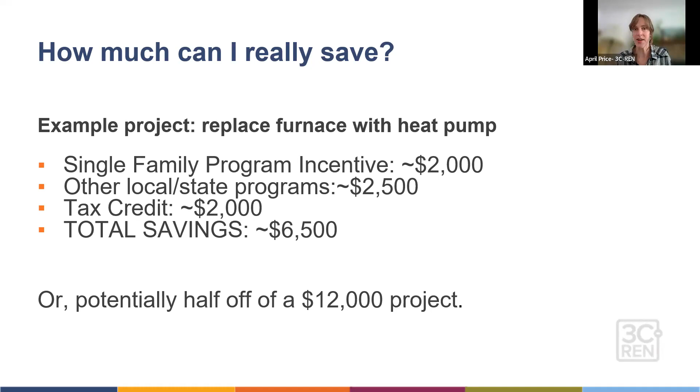So if you're looking at perhaps an overwhelming upfront cost of something in the neighborhood of $12,000 for a heat pump replacement, it's not unreasonable to think that by stacking these incentives or tax credits, you'll save half off your project. And as long as you work with an enrolled contractor, you'll be walked through those offerings. So with that said, I'm happy to answer questions in the chat regarding incentive programs, but I am very happy to introduce our guest today, Larry Waters from Electrify My Home. And I'll go ahead and just pass it over to you.

Hey, thank you. I appreciate that very much. And we appreciate being part of the 3CREN program. Today, we're just going to talk about how to electrify your home, preparing yourself for the path forward on electrification. Just a little bona fides real quick. I've been in the HVAC industry since 1982. That's a long time ago for those that aren't keeping track.

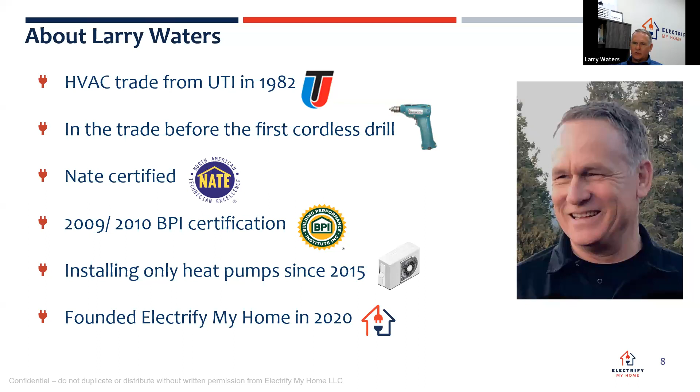I'm a NATE certified technician. I have been a BPI certified building science person since 2010. I personally have only been installing heat pumps since 2015. And that was before we really had the word electrification or decarbonization on the tip of our tongues. And I founded this company, Electrify My Home, in 2020, so that we could be an absolute resource for consumers that really wanted to understand the full approach of things. For the agenda today, the introductions which you've had, we're going to talk about validating the switch, kind of the reasons why we would want to electrify.

Where do we start as a homeowner? The order of operations, because that's extremely important when you're doing this. And then our process of what we call good electrification. One more thing about us, our mission statement is to provide the most efficient, cost-effective electrification solutions, be a good steward of the electrical panel.

We talk a lot about electrifying on your current electrical system, and training and influencing other contractors to do the same. We also do these homeowner workshops for several different utilities across the state as well. So getting the word out for good electrification is extremely important.

Really quickly, the basics of validating the switch. So why do we need to electrify in California? So it's pretty easy. We've got pollution goals in California. In fact, of the top 10 cities in the country for bad air, 6 of them belong to California, which is pretty crazy if you think about it. So we established a building code that is looking at pollution-free electric heat pumps as a baseline technology. It leads to a transition off fossil fuels in the houses.

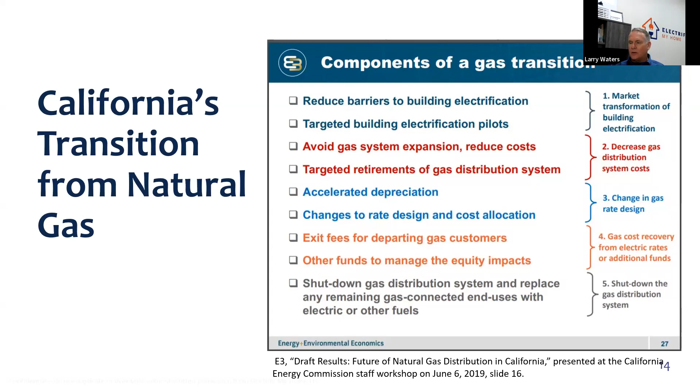Time flashes really quickly. I've been doing heat pumps since 2015. They were talking about all this way back in 2017. So we are now far beyond that. We are 7 years away from 2030, and that's a biggie. Currently, about 90% of California homes rely on gas for space or water heating. 12 million houses in California use gas or electric resistance water heaters, which both of those are a great opportunity for a heat pump installation.

11.7 million California homes, 96% of those have gas or electric resistance heating. And there's 3.4 million houses in California with no air conditioning. So probably quite a few in your area on the coastal side with no air conditioning. And we know the climate is changing. There's more and more days every year where we could be comfortable. The beautiful thing about a heat pump is it's carbon-free heating with free air conditioning.

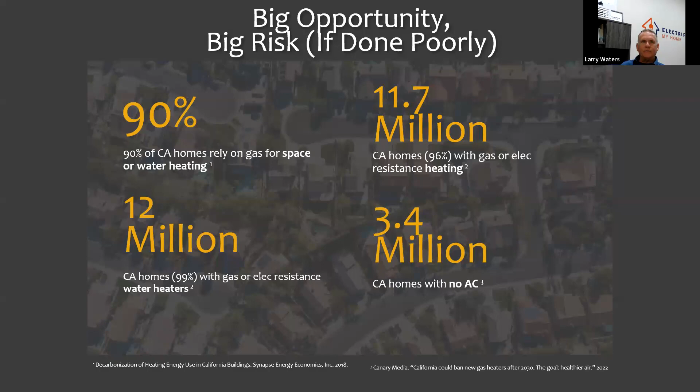So where do we start? Where do we start as a homeowner and a consumer? You should do your own gas assessment and inventory. And you can do this by just looking into your existing gas and electric usage bills, particularly the gas bills. If you're in some of the territories that are covered by 3C-REN, SoCal Gas will be your partner with gas, and analyze your bill.

Look and see when it's costing you, what it's costing you. A great way to do that is look at April and May, find out what your lowest bill of the year is, and then look at your highest bill of the year and just realize that's what's going to heating a little colder water and heating your home. So those are the dollars that we can recoup when we're doing the electrical upgrades.

If your electric is Southern California Edison, you can go to the Energy Manager on their online portal. If they use PG&E, they've got a great resource available with Home Checkup. And if you really want a comprehensive report about your usage in your particular home, all gathered through data, you can go to our website, or you can go to find home energy analysis, or you can go to electrifymyhome.hea.com and you can take the test. They'll send you out a really cool report that tells you when and where you're using your energy.

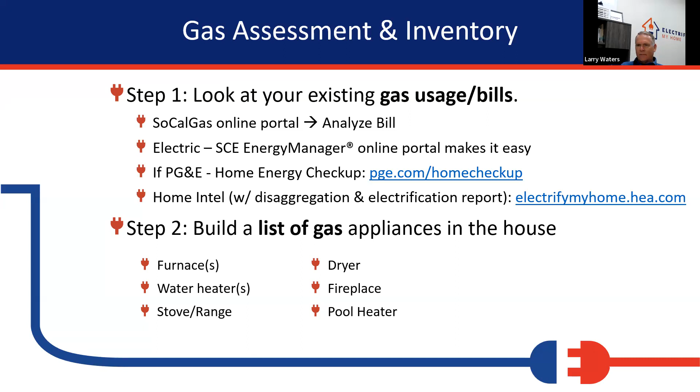Step 2 would be to build a list of gas appliances in the house. We want to make sure we're thinking of all of them. Even the pool heaters out by you guys, dryers. A lot of people don't recognize that they have gas dryer, gas fireplace, stove, range, water heater, and furnaces. These are all the pieces of the electrification roadmap. There's really eight things in the house that you really concentrate on that could possibly give you a good benefit.

But induction cooktops, heat pump HVAC, heat pump water heater is what we're going to concentrate on today. Solar PV, if you don't have it. The economics have changed on solar a bit in the last year, but solar is still a really good investment if you also invest in storage. Electrical panel upgrades may be required as you get further down your electrification path. And then, look at heat pump clothes dryers if you don't do too many loads of laundry a day.

So how can you find an electrification partner? It may not be your existing HVAC contractor, so keep an open mind. HVAC contractors in California have been extremely good at working on gas furnaces for years. They're really experts on them, but installing heat pumps in houses with gas furnaces is really a very new thing, and a lot of people are still figuring it out. So be careful about who you choose.

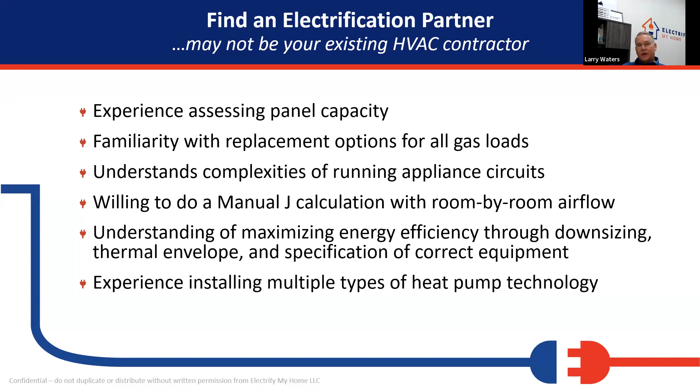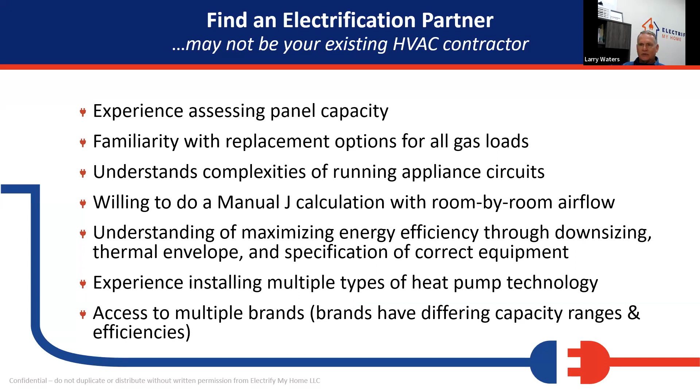Find a contractor that has experience installing multiple types of heat pump technology. And we're going to talk about that towards the end of this presentation. You'll get a better understanding. And access to multiple brands. No one brand does it all. There are several contractors out there that handle multiple brands, but it's not a 100% one size fits all with heat pumps, especially. Gas furnaces a little less important, but just ask if that contractor has access to multiple brands and multiple types of heat pump technology.

Make sure you do a little due diligence on these companies and check for reviews. Look at the Yelp reviews, whatever you're looking at, and then look at them a little deeper than just the number of 5-star ratings they have. A lot of contractors have a lot of 5-star ratings for, like, Bob came out and fixed my furnace when it was really cold. That's not going to give you good reference to whether they know how to install a heat pump or not.

There's several other ways you can find people, like on Energy Sage, or some of the heat pump manufacturing companies like Fujitsu, Mitsubishi, and some of those also have dealer locators that'll help you. And those groups are also going to help you find somebody that's probably going to do a little better workmanship, because bad workmanship can really cost you a lot of money.

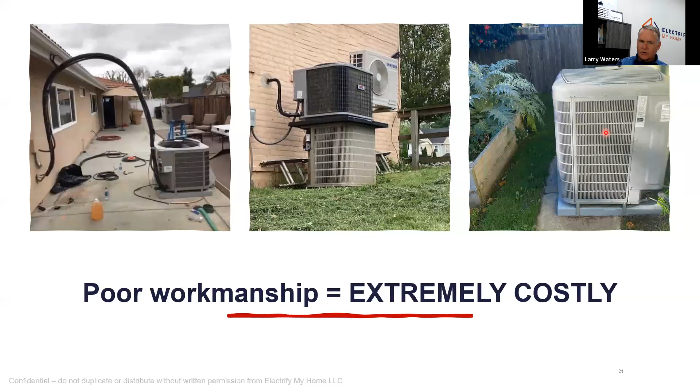They had to get a new panel to get this system installed, and it was only big enough to carry the capacity of this. So they had to invest in electrical panels twice. If they would have put the right solution in the beginning, they would probably have never had to put an electrical panel in until they got their storage batteries. So that's important.

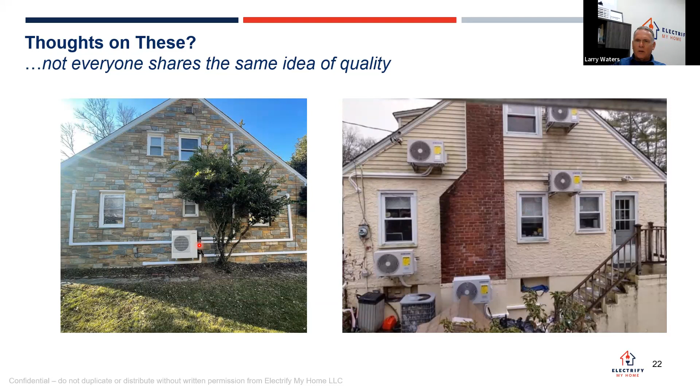If I had this beautiful house here, I wouldn't want all these lines up my wall. That may have been the only way they could have done it. But if I came rolling up my driveway and I saw that and I wasn't expecting it, I would be a little bit irritated. Even though it looks symmetrical, it's not necessarily pretty.

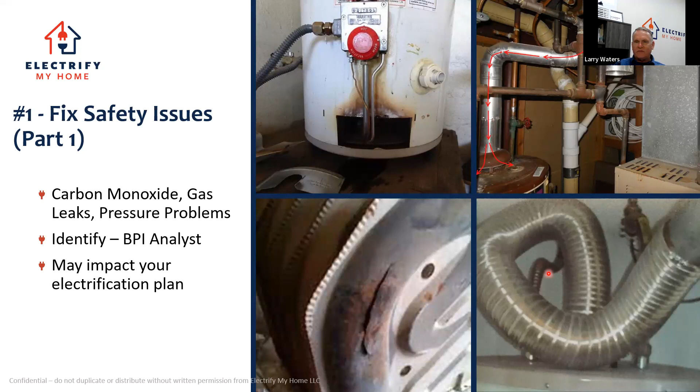Order of operations. Every house is unique, and we recommend a specific cadence on this. First of all, get somebody that's savvy on looking for safety issues. The safety issue can change the direction. This has happened before, where the first order of business was to install the heat pump water heater, and then we come in and find a furnace that's unsafe. Or we want to replace the furnace with a heat pump system and we find a water heater that's unsafe, or some fluing that's unsafe. You need to make sure when you talk to a contractor that they have the ability to diagnose safety issues, and they will be doing a safety check as part of your electrification plan.

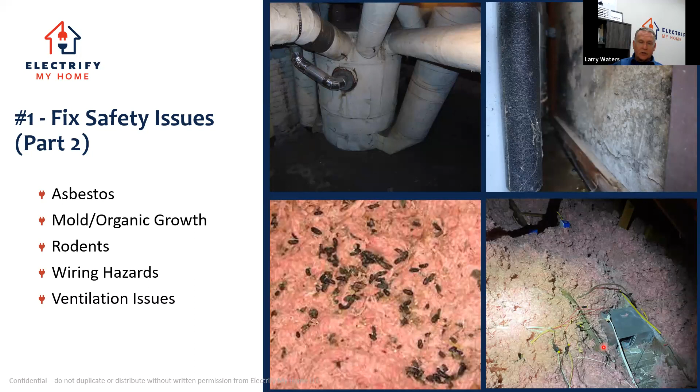That includes things like mold and asbestos, and just rodent damage, or incomplete things like bathroom fans in your attic that aren't hooked up all the way. These things need to be discovered and not buried under construction. So it's important that the contractor takes a lot of pictures, shares a lot of pictures with you, and you ask a lot of questions.

You want them to be able to do an electrical panel assessment. The important things to understand there are: how much service do I have available? What is my main breaker? What is my main power input? And then how are you going to manage that? And can you do it without a panel upgrade? How big is your panel? How old is the panel?

Do you have sub panels in the house? What are the breaker sizes on those? Don't add a circuit into a sub panel unless the circuit breaker that feeds it is capable of handling the load. And this can help you figure out when you need to do your panel upgrade, if you need to at all.

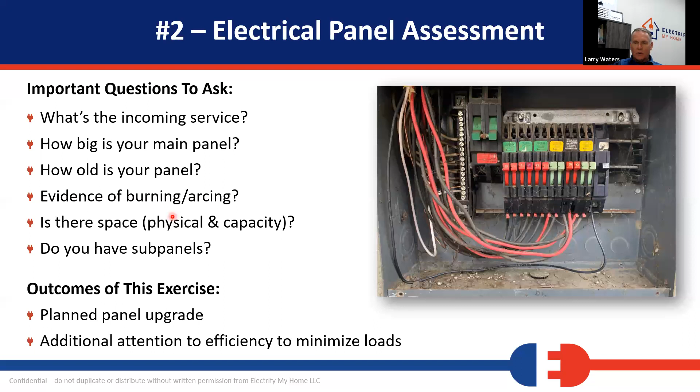We work in the Bay Area of California a lot, which has a bit of a similar kind of temperate environment that you guys share. And we did just under, I'm looking at my whiteboard, just under 200 heat pumps last year and only had 6 panel upgrades. So it is possible to electrify a lot of this stuff before getting your panel. Our philosophy is let the battery and solar guy do the panel.

Pre-wiring. If you have the opportunity to pre-wire, if you're doing a heat pump system now and you're thinking about a heat pump water heater later, inquire with the contractor about running that wire to that heat pump water heater now, so that when that water heater inevitably fails on a Friday evening, you can get a heat pump put in there and you don't have to go back with another gas model because you couldn't get an electrician out there to run the wire.

This has saved multiple of our customers over the last few years a real headache. When we get the call on Monday, it's like, hey, you put in that circuit, my water heater finally died, and then we can get out and take care of those pretty quickly. And make sure that you're keeping in mind that most houses in California are going to have an electric car at some point.

Addressing the ductwork in the system. We want to make sure that the ductwork is in good shape. Heat pumps and furnaces have different requirements for airflow, and you need to have a contractor that understands. It's not a bad idea to talk to multiple contractors about this. Use some of this information to get the feel for the best one.

It's not always the guy that's going to come out that has a nice uniform and a charming personality. That may not be the right guy if they're just taking a peek into the attic or under the floor and saying everything's fine. You really need to do an assessment on the ductwork.

Old duct systems oftentimes have very low airflow. A typical duct system leaks about 30%. When we're talking about installing a heat pump that sometimes has 30% or 50% less capacity than your furnace, it's really important that the duct does not leak 30%.

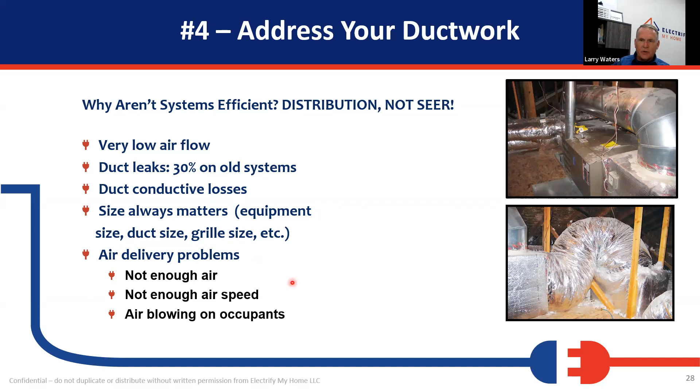Now, this is from an older home. I think you guys have a batch of these houses out there too, with built-in china cabinets next to the fireplaces. These always leave big holes up in the attic, and these big holes transfer heat. They suck heat out of the house in the winter, and they cause heat to come in the summer, because they're open to the hot or cold attic temperatures. So be careful about that.

If you have a crawl space, ask the contractor, are you going to be sealing in my crawl space? Because there's usually big holes under there, and these big holes, when it's cold outside and your house is warm, it'll either steal warm air from the house, or the warm air rising in the house will pull cold air in behind it. So it's a really good idea to seal up some stuff if you have the opportunity to do that. These big holes, we just seal them. We put a piece of foam board over them and then insulate over them. But don't be afraid to ask these questions. Does my house need to be sealed?

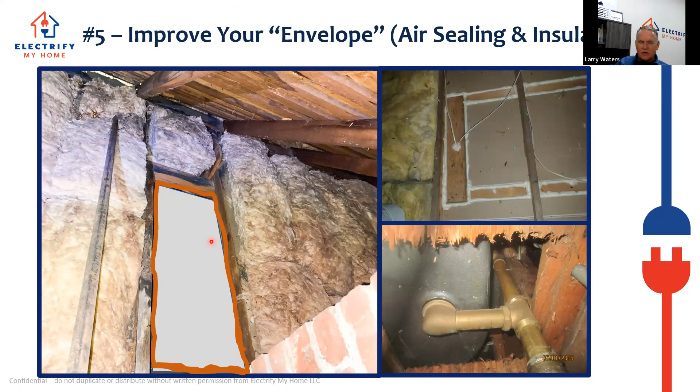And then put as much insulation in as you can get in, up to R50. R50 is a great number. That's what this is. This is about 20 inches of insulation. R50 means your attic has to be 50 degrees warmer or colder than the house before any energy is moving through. So on a 95 degree day, when your attic is 125 degrees and you have R50 insulation, you can have your house at 75 and you're not driving any heat through the ceiling.

But if you only have this much insulation, which is about R10, anytime the attic is more than 10 degrees warmer than the house, it's going to be driving heat into the house. And in the wintertime, it's going to be pulling heat out of the house. So this is an inexpensive thing to do, and it can make things much more comfortable, and it will reduce the operating cost of your heat pump system over the life of the system dramatically. So it's a really, really good investment to insulate.

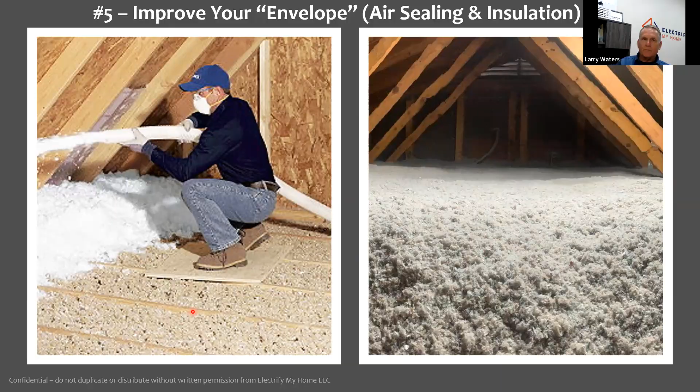And if you have your ductwork in the attic space, this slide is a good slide if you guys want to gather it. I'm just going to kind of go through it. How much insulation is around those ducts is really important, especially the hotter your attic gets. So in the summertime, when your attic is 125 degrees and your air conditioner is pushing cold air through those ducts that are sitting in 125 degree air, it uses a lot of capacity from the system just to keep those ducts cool. And what we don't want to do when we're putting in a new heat pump is pay for more capacity than we really need.

So burying the ductwork with insulation while we're insulating the attic is a really good solution to save energy. In fact, a typical 1,500 square foot house with R3 ductwork is going to use about 14,000 BTUs, or 1.2 tons of air conditioning capacity, just to keep those ducts cool when the AC is running.

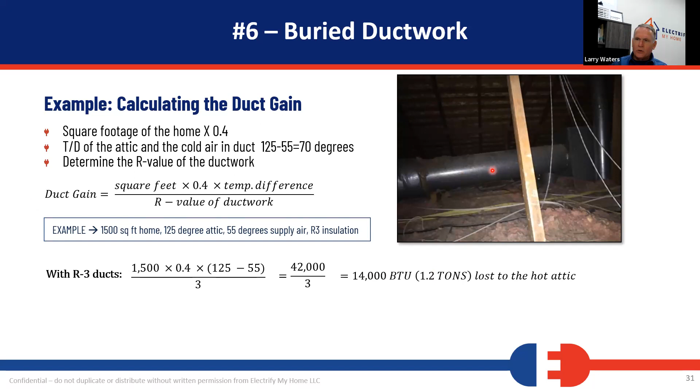So just by insulating that attic and burying that ductwork, we can get that loss down to 1,400 BTUs. So basically we save a whole 1 ton of cooling or heating capacity here. And that allows us to downsize the system a little bit, which means a lower initial price. And it also means a much more comfortable home. And then you're getting the benefit of the insulation and the insulated ductwork there.

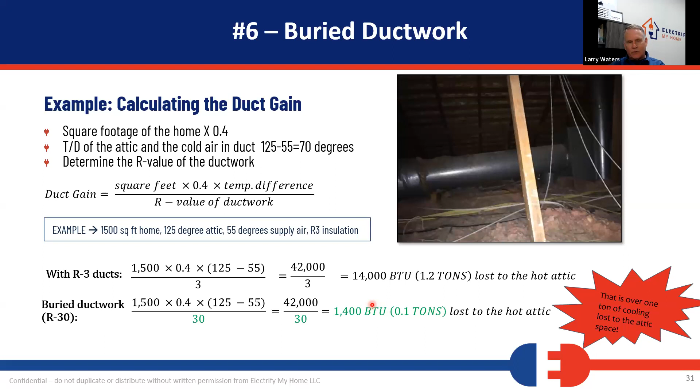That's over 1 ton of cooling capacity. Typical 3-ton house, when using rule of thumb, is going to have a 3-ton system in it. By just doing this, we've already reduced the need for a 3-ton down to a 2-ton, which is going to use a lot less energy over the life of that system.

If you can find somebody that does a load calc, not all HVAC companies do load calcs, and most of them have some way to calculate out the load. If you want to get really precise, find someone that does do this, or call a third-party service that does load calculations and get the load calculation done so the contractor can follow that load calculation. What this is going to tell you is how much airflow you need in each room, and it helps determine what size system is really needed for your house.

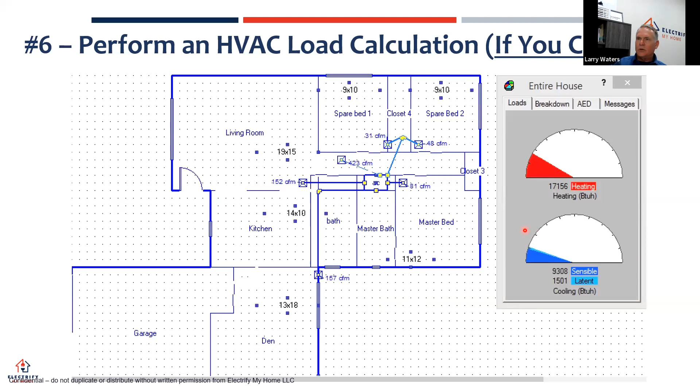And a good example of it is, here's a couple of rooms. They're both 9 foot by 10 foot. One of them is spare bedroom 1, spare bedroom 2. This is the amount of air they need. A cubic foot per minute of air is about the size of a basketball. So this room, to stay comfortable, needs 31 basketballs every minute. This one needs 48 basketballs every minute. They're both the same size, but this one has double exposure. It has 2 walls outside. If you don't take this into consideration, it's gonna lead to less even temperatures throughout the house.

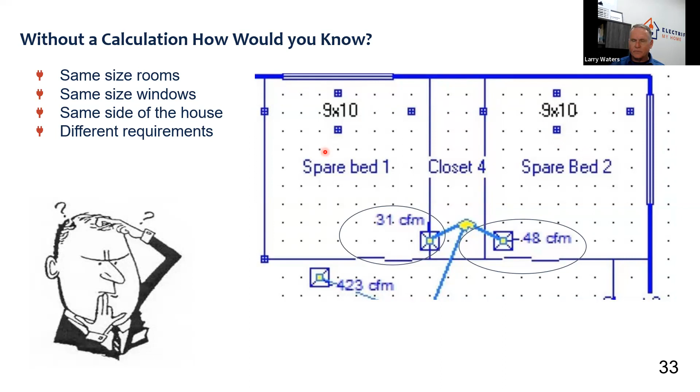What is good electrification? It's installing the most efficient solution possible. That means putting in the right size unit and putting in a unit that uses the least amount of energy. It's okay to spend a few dollars more for a system that's going to use less energy over time, because almost always you will recoup those costs on the other end of the ownership. As a matter of fact, our systems that we install typically require 25 to 35% less energy over the life of the system, which can amount to a lot of money over 15 to 20 years.

Also, good electrification is utilizing the existing infrastructure whenever possible. So that's going back to being a good steward of the electrical panel. And good electrification is also considering all electrification requirements from the start. You really should be talking to somebody that's going to at least consider those other appliances you have, the impact we're making on the panel, and give you at least a basic, semi well thought out plan.

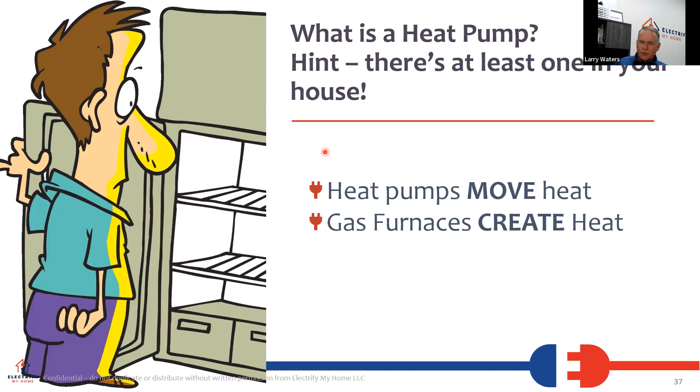And electrification can't be done without heat pumps. Heat pumps are magic. Heat pumps move heat, they transfer heat. Gas furnaces create heat. Gas furnaces burn fuel, create heat. There's exhaust that comes out, and there's always losses when we burn a fuel and get a use out of it. There's always going to be some sort of an efficiency loss. In fact, the most efficient furnace on earth is only 98% efficient. It means $100 worth of gas will buy you $98 worth of heat. It's not untypical for heat pumps to be 3 to 4 times more efficient than that.

Traditional heat pumps that just turn on and off do suffer a bit when it gets colder outside. So at temperatures below 45 degrees, they start losing a little bit of ground and they have to run longer. There are other systems that are better for that.

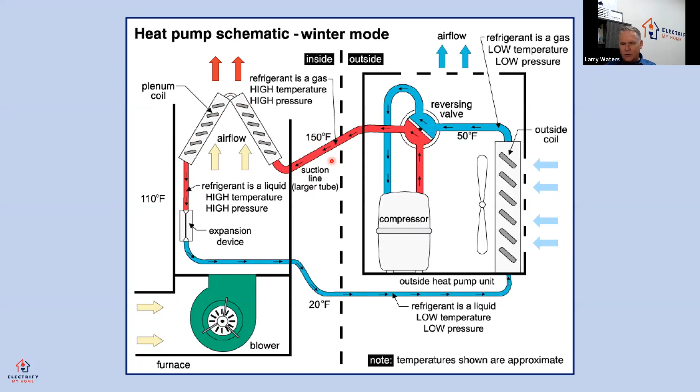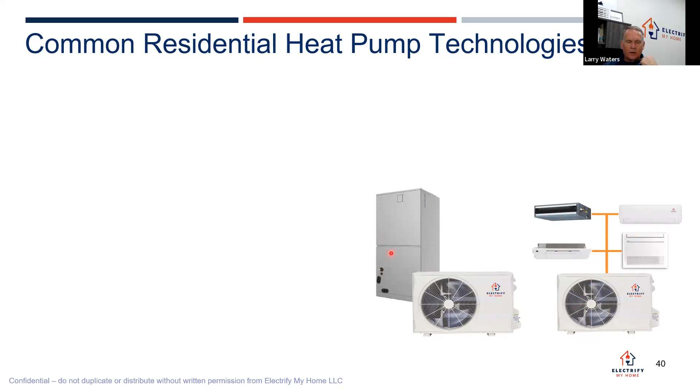Common residential heat pump technologies are inverter style systems. They can come as wall mounted units, something tucked away in your attic space or in your ceiling, or something down low on the floor like an old radiator. A lot of options for this type of unit, but something like this would require a separate unit in each living space. Or you can use the same type of technology with an air handler that will deliver through your existing or a new duct system.

The other type is called the unitary. We call them the on and offs. The on and offs are going to use a little bit more energy because every time they turn on, they have to have a big influx of energy to start the motors up. They're typically going to warm a little warmer than you're asking for. If you're asking for 75, they're going to heat up to about 76, and then they're going to cool down to about 74. And you're going to feel that temperature differential.

The modulating or inverter units are going to be able to stick to the temperature in the house. So they heat the house up or cool it down, get to the temperature, and they just slow down and run longer cycles. So they have the ability to saturate everything and make the house extremely comfortable because of longer run times. Also, with the inverter technology, we can put a really good filtration system on one of these and clean the air anytime it's operating. With this type of arrangement, we are going to give up on our ability to really clean the air as it's moving through the system.

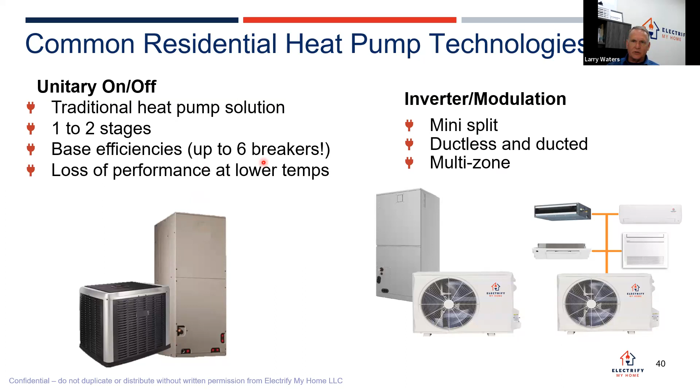Another thing is most of the time, these are going to use 2 breaker spaces, and it's going to be a much smaller breaker. These systems can use up to 6 breaker spaces. So those are things you want to consider as you're electrifying.

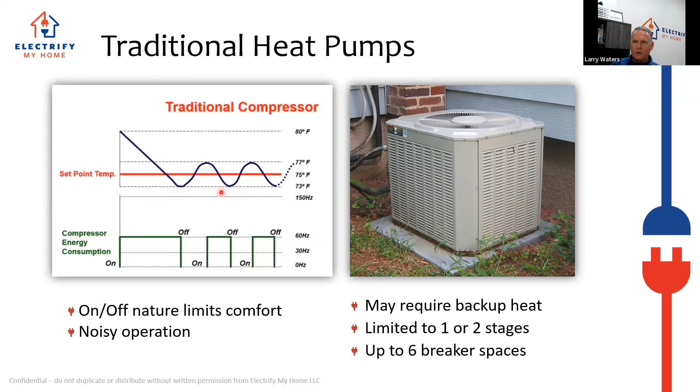So here's the graph that shows that. With a traditional heat pump system, it's 80 degrees in your house. You want it to be 75. You turn the unit on. It uses a lot of energy to kick over and run, which can really be hard on solar and battery systems. It cools the house off a little cooler than you want it to be, shuts off, lets the house get warm again, turns back on, cools off, lets the house get warm again. And it basically does the same thing in the heating mode. It'll warm up a little more, cool off between cycles. This is no longer the most efficient way to heat and cool a house. It's a lot like having arbitrary stop signs on the highway once you get up to cruising speed and good mileage.

Inverter-driven heat pumps operate a little bit differently. You turn on that inverter-driven heat pump. It doesn't use a lot of energy to start. It can operate outside the normal 60 hertz cycle range. And so it uses a tiny bit of power to kick over and start running. And then once it's running and has established the flow of refrigerant, it can ramp up and handle the load in the room a little quicker. But once it gets to set point temperature, it slows down.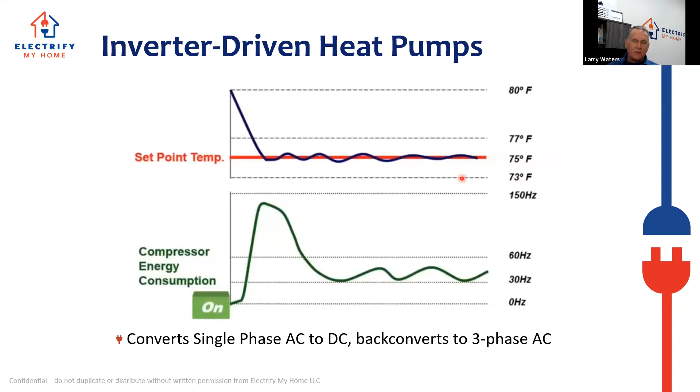Trying to plug and play a system. If somebody comes out and says, you've got a bad furnace, I can sell you a heat pump right now, I have it in my catalog. Without doing a little bit of extra legwork, having a heat pump installed can be not great.

When somebody's doing one of these, they need to pay attention to the velocity of the airflow and the temperature of the air coming out. We don't want it blowing on you. The sizing of the system needs to be right for your house. It's never going to be the same size as your furnace was. It just can't be. And it may not be the same size as your old air conditioner was if you have air conditioning. You need to do the panel planning.

That often goes by the wayside when we're plugging and playing. The plug and play heat pump really happens when something has failed and they say we can't make it run again and you want a heat pump, so we're just going to plug the system in there. We need to make sure that people are educated properly through all this, including changing the registers in the house, whether floor, ceiling or sidewall registers, to the right kind.

I don't know if you already have the right kind or the wrong kind in your house, but the rule of thumb is if your registers blow multiple directions, like two ways or three ways, those are not the best solution for heat pump systems.

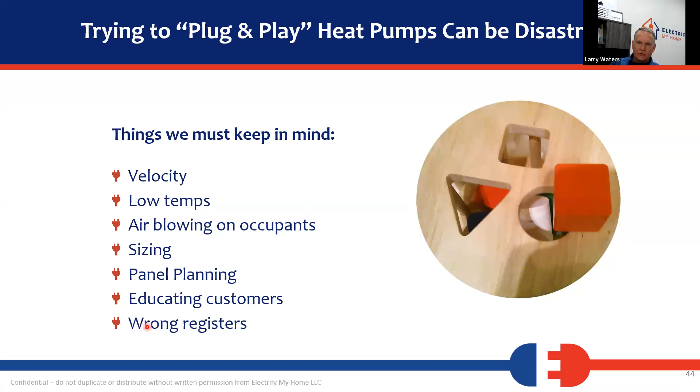Good workmanship saves money in the long run. This is why you've got to ask your contractors for pictures of their work. Most contractors are going to show pictures of their best work, just like all of us do, because it looks beautiful. But you want to see things like a proper system put in, going the extra mile with the drainage systems. Everything looks nice, neat, tidy and clean, and they can explain to you what all these pieces are.

So when they're showing you these pictures, go ahead and ask, what is that? Is it supposed to be that big? What is this piece here? Why is it on this stand when my old furnace comes in the side? Ask those questions. You're going to invest a lot of money in this, and you want to make sure you're making the right decision. Don't be worried about hurting somebody's feelings. You need to be an advocate for yourself on this stuff.

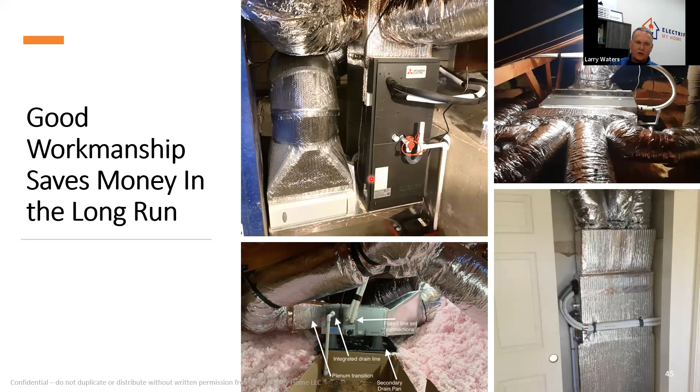Right-sized heat pumps are going to bring really big benefits. If the systems are sized right, you choose the right system and it's installed well, you're going to get way better comfort in your home than you've ever had with a gas furnace. I guarantee it. They have to be done correctly. Heat pumps are generally going to be much more quiet if you choose the right system. The inverter technology systems are extremely quiet compared to traditional heat pump systems.

You're going to be in a much more environmentally friendly position, which will help the state with our carbon reduction and air cleaning goals. Obviously, electric appliances are much safer than a furnace that has fire, can possibly create noxious gas and could potentially have a gas leak in the house. If we eliminate the gas lines and combustion appliances in our houses, our children are going to be healthier, our houses healthier and safer, and we're not going to risk some catastrophic thing happening that could cause people to get very sick.

And then you're going to have great indoor air quality if you match a new system with a good air quality device. The rule of thumb for us, and I've been in the trade for 40 years: the less fancy the filter, the better off you are. A cartridge filter that has a high MERV rating that you can replace for $40 or $50 a year is available out there.

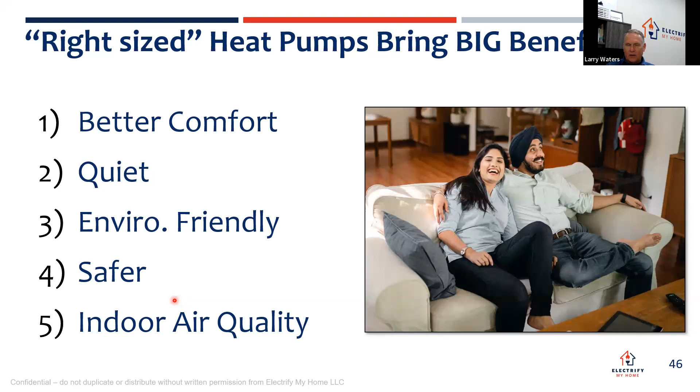There are really fancy ones that people can get you very emotional about, with wonderful blue lights, shocking electrical pulses, corona fields and all of these things. But those are moving part systems that need to be kept extremely clean and lose efficiency very quickly. A really good cartridge filter combined with a heat pump that's going to run longer is the ticket to good air quality.

So in summary, and I think we're right on time here for some questions. In summary, electrification isn't going anywhere. Don't try to wait this thing out and say, I'm just going to wait till some other government comes in and changes everything back. We're too far for that. Those days are gone. Electrification is here to stay in California. Embrace it and do it properly.

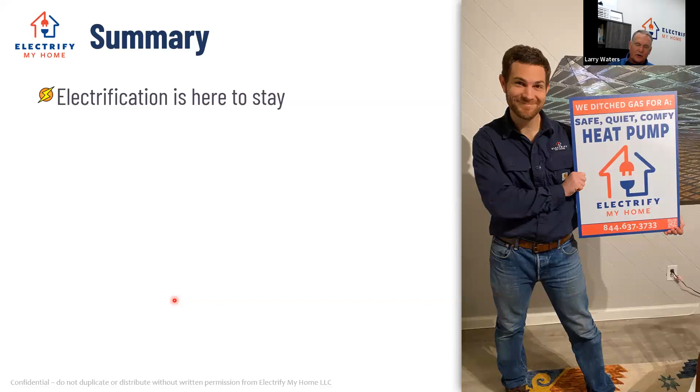Understand as well, early adopters are going to reap the benefits of the carrots. There's tons of carrots out there right now. We were just talking a minute ago about the incentives that are available. Those are not always going to be available. So do the best you can to optimize the incentives. Electrification is not going anywhere. Start by creating a plan.

Get your own plan started with the information from the first slides before you start talking to contractors, because you'll be able to figure out the contractors that are worth their salt after you start asking them real questions. Most consumers don't come to the table with any knowledge whatsoever, and those are the ones that get systems that aren't necessarily the best application. Those might be the best system for the contractor, but not the best system for your home.

So start creating your plan, get your roadmap together in your head, prioritize safety, make sure that there's going to be some sort of a safety check element in the process that you're going through. If they're going to check and make sure your water heater is safe, if they're just doing the heat pump, ask about pre-wiring, make sure you pay attention to your ductwork.

If somebody tells you without doing a comprehensive look and a calculation that your ducts are fine, talk to more people. They may be fine, but you want to have somebody verify that, because sometimes contractors might tell you that they're fine, even though they're not, just because they don't want to mess with them.

Do some load reduction, attic insulation, a little bit of air sealing. Go buy some cans of foam at Home Depot and start sealing stuff up. Just don't seal up the vent holes for your water heater. And load calculations when you can get them. Heat pumps are a necessary element, but they must be done carefully.

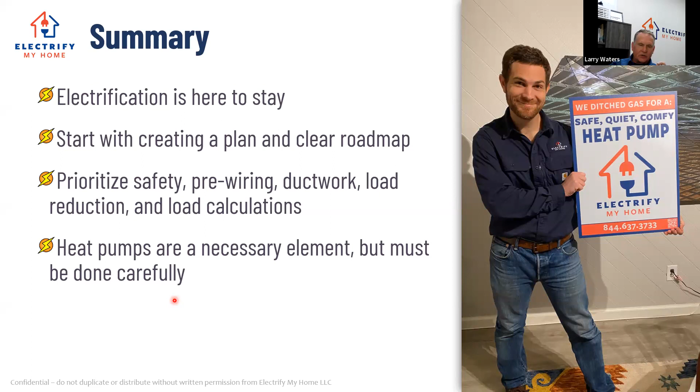We have 3.7 million houses in California with no air conditioning. When every house in California that doesn't have air turns on their air conditioning during a heat wave, it's going to cause drag on the system. If everybody goes out and gets a really efficient system installed, it's not going to cause a drag on the system, because once the house is cool, the unit's using a tiny bit of energy. So those inverter systems are really good for the environment and the whole electrification plan.

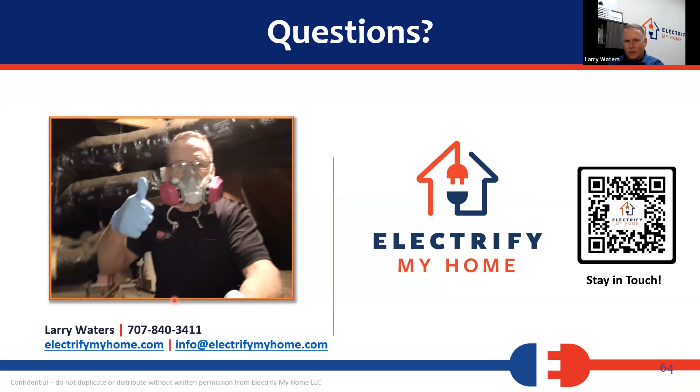Yeah, there's also on those, if you wanted to get really creative, there's different switches and things that you can buy that you can plug the unit into, and you can program it not to run during those times, and it just basically shuts off power to the unit during a certain period of time. So you might want to look for something like that as well if you don't want to wait on the Bradford White controller. Okay.

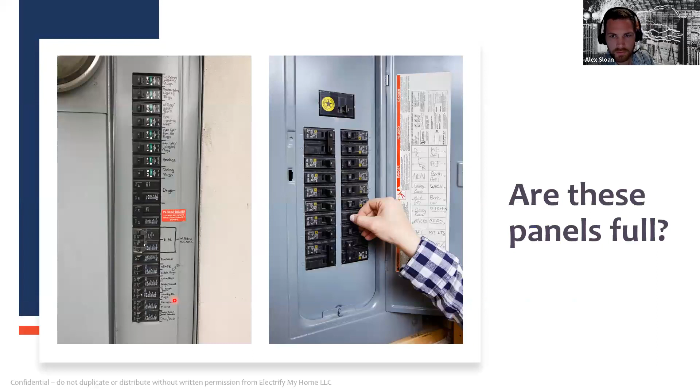Let's jump back to the panel question right now. So is there a smart panel out there that can work on 100 amp feed from the street? And I mentioned Span and also the Leviton systems, but also that oftentimes we can avoid needing an upgrade altogether by going through a few different switch adjustments. So Larry, if you want to go back on your keyboard a couple slides, maybe 5 slides, we can run through those really quick for a couple of the solutions. So there we go. If you want to advance through the next 3, we can chat about breakers really quick in the last minute we have here. Okay.

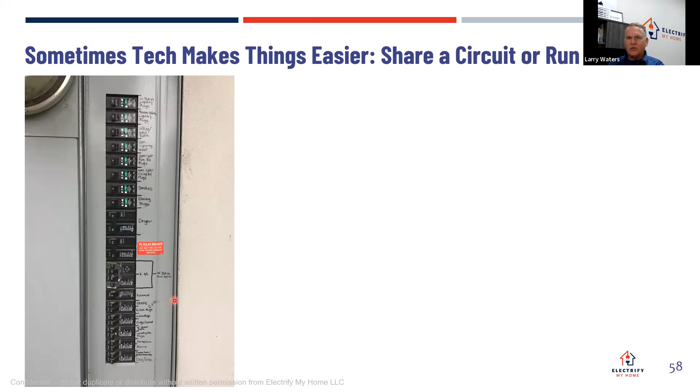Yeah, so we do this a lot. We do these panel stretching. We call it the watt diet, or it's part of our recipe for good electrification. But there's things that you can do, like if you're putting in a heat pump water heater, there's circuit splitting devices that are available that can help us move loads around. So this particular one is a dryer in one side and a car charger in another. We probably have at least a half a dozen of these out there running the dryer on one side and the heat pump water heater on the other side.

So there's these smart attachments, but there's also the Span electrical panel, which is a big one, especially if you're going to do an electric car charger, because the way the Span panel works is it doesn't look at the car charger in the same way as the other panels do, because it has a car charger that works with it called Span Drive, and that Span Drive car charger can actually speed up and slow down depending on how much energy you're using in real time in the house. And also there is the ability for you to program circuitry on and off with that. And the Span panel has like an override, and it won't let you go over the use. It'll start shedding other loads.

I have that same problem at my house right now. I have my wires in the street. I have a 100-amp panel. I have solar, batteries, 3 heat pumps, electric dryer, and I want to get the car charger. So I'm putting the Span panel in next month so I can do the Span Drive car charger. And I'm going to be able to do that all on 100-amp feed.